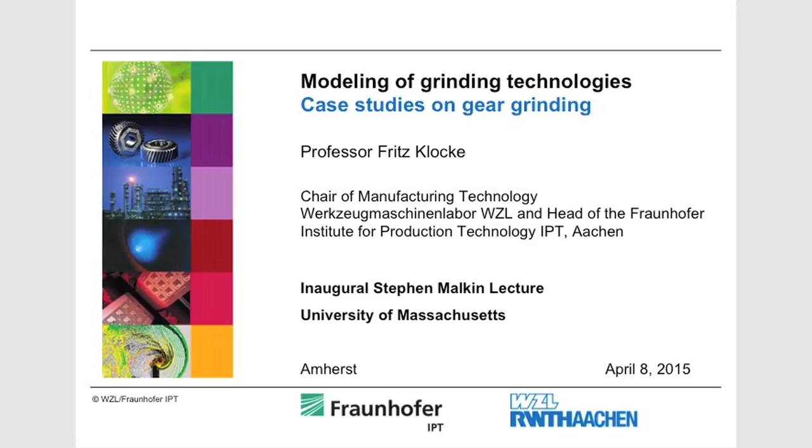Steve inspired others to do their very best professionally by the example he set, not by directives or dictums. He generated love and goodwill in everyone with whom he came in contact by asking a very simple, but too often unasked question: how are things going? And he was an engineer of extraordinary accomplishments, a member of the National Academy of Engineering, and a bright star wherever he went. Steve's wife, Maccabee, and his daughter Ruth are in the audience, and they know I could go on and on about what a wonderful person and colleague Steve was.

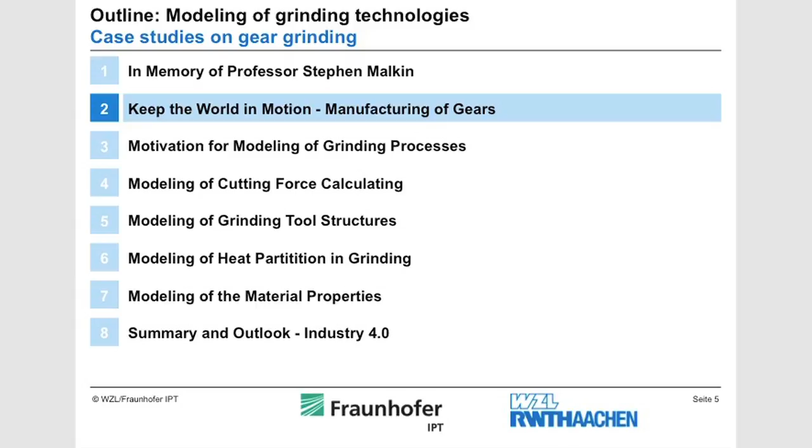So what do we do? Of course we do research, education, and service. That brings me to today's topic: modeling of grinding technology, something about the fundamentals, about the basics. Gear grinding is really a practical issue. So now I have this combination that Steve also liked: learn about the knowledge, learn about the basics, but then solve a real problem.

Gear grinding is one of the most complicated and most delicate grinding processes that we have. So why gears? Is gears old-fashioned? If you go to the marketplace and ask normal people about gears, they most likely say that's blue-collar work and steam engine stuff. But we have gears in many, many different applications.

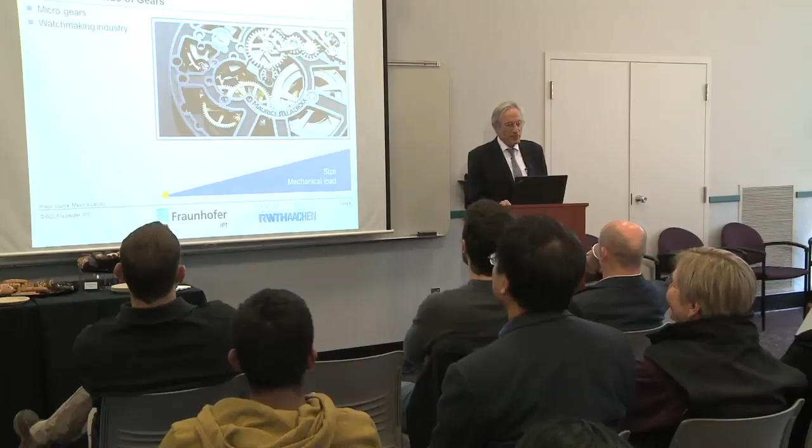That's just high precision gears, as you see here. Then we have, of course, the cars and trucks. By the way, we make about 1 billion gears, pairs of gears, per year, and that's increasing. So we are making a lot of gears.

And if you were a designer in a car company laying out a gearbox, you would say, okay, I shoot for a lifetime of a normal gearbox of 200,000 kilometers, 250,000 kilometers.

If it was a truck, you would calculate roughly about 1 million kilometers lifetime of a gearbox. So if you run into trouble with your car, if you are far away from 200,000 kilometers, you might ask for warranty. But if you are above 200,000 kilometers, most likely they say, okay, that's normal life.

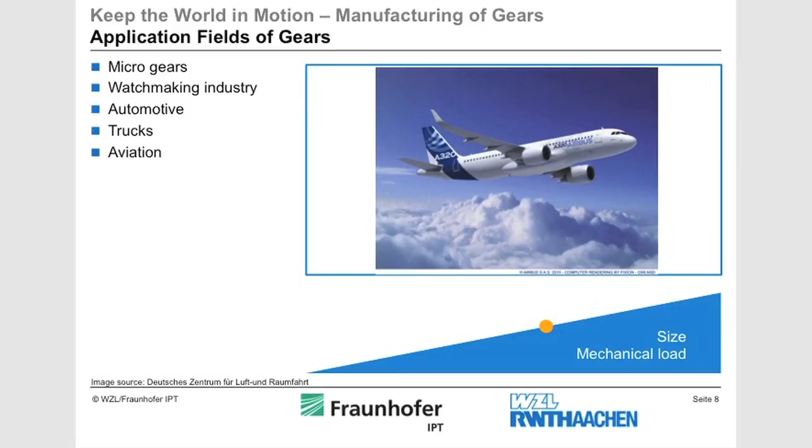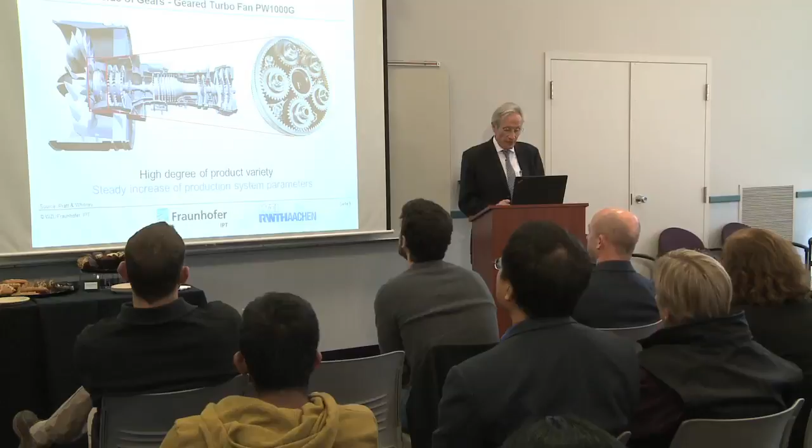We have also gears in planes. That's something people sometimes don't consider. Over the years, there are little gears in planes which adjust the flaps or other components. But in September of last year, a new plane was launched by Airbus, and this plane has a planetary gearbox right after the fan. That is because if the rotor runs at very high speed, you need this gearbox to bring the rotation of the fan down. Otherwise, you would exceed sound speed on the tips of the fan. So now we have also these gears in a real airplane. That is a Pratt & Whitney turbofan, and that is increasing. So that was just an eye catcher.

So these are the flights per day. We have per day about 200,000 to 250,000 airplanes airborne. Every airplane has, on average, 2 engines, so that's 400,000 to 500,000 engines in the air every day.

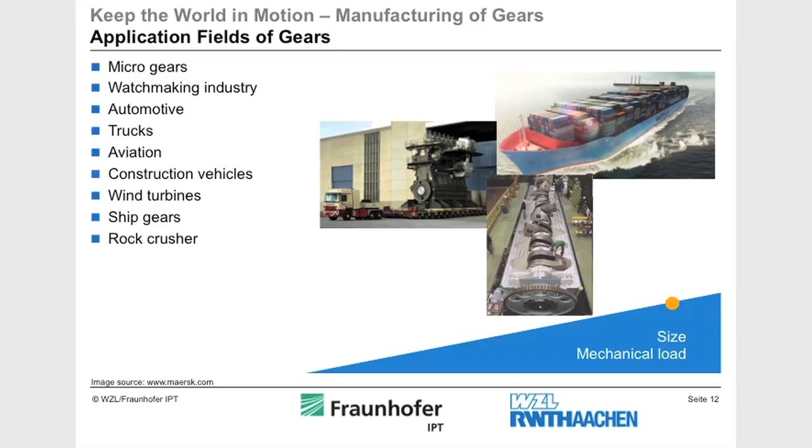That is also well known. So that's energy. If you see these windmills, you might distinguish into 2 classes. One is where the wind power is directly converted into electrical energy, so 50%, and the other 50% has a gearbox, generator, and the windmill. And the last one, of course, we have really big gearboxes for big ships or for rock crushers, etc. Rock crushers, just to give you a number, rock crushing you might have 1 million Newton meters torque, very low speed, 1 million Newton meters torque. That is really a big gearbox and big gears.

So now the question comes up, how is the gear made? That depends, of course, also on the size of the gear. I take now the gears which are used in trucks and in automobiles, personal cars. You start with a blank, you cut off the teeth, and after that you normally have a heat treatment, so case hardening, and then you do hard finishing. That brings me to today's manufacturing processes I will look after: the hard finishing processes, the gear grinding.

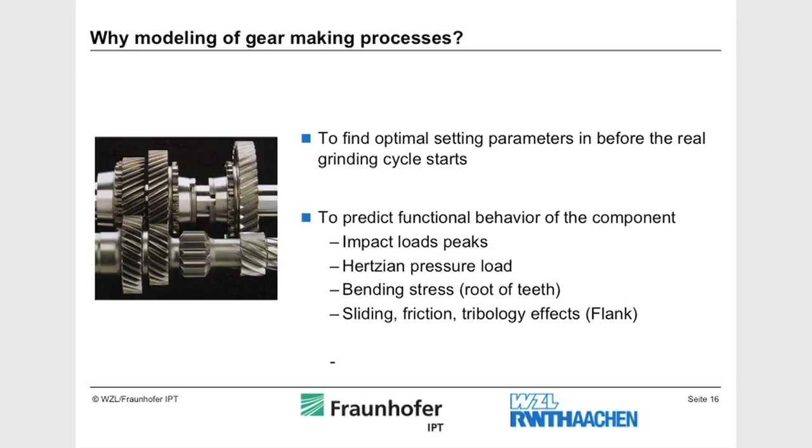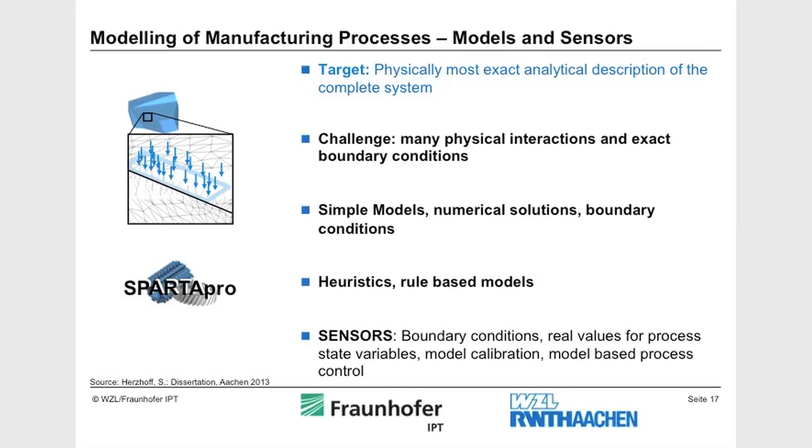So why do we really shoot for models in modeling gear making processes? Of course, to find optimal setting parameters, to keep the costs down - that is number one. But what is even more important is to predict the lifetime of a gear. Any cutting process needs energy, and at least a portion of this energy goes into the material, into the component, and it changes the properties of the component - whether or not that is allowed within the tolerances is the second question. The first question is we really have to consider, we put energy on the surface of the material, of the component, and then we change the component properties, and at the end, most likely, also its life. We would like really to predict the lifetime. That's the reason why we have this approach of modeling. And it's always our target really to come up with a very sound model which is based on physics, on constitutive parameters, etc.

The problem is there are so many interactions. Another problem is boundary conditions - in general, which we sometimes do not know. Then we have a set of parameters and a set of very nice differential equations, but as we don't know the boundary condition, our result is not good enough. So in German we have a saying: God made the differential equations, the boundary conditions were made by the devil. And that tells the whole story.

So then we go to the next step. We have simple models, we use computers, which is good, but also heuristics - if you have experienced people who really know what they are talking about, that's also very valuable. Ask people - heuristic and rule-based models are also good. And the last one, which should be the last portion and last topic of my talk today, is sensors. Why not combine the models that we have with the real world, where we really hear, smell, look into processes, where we put sensors on, and then combine good modeling with the real life which we can take from real processes.

So then we have the virtual production, of course.

That's what we look at, to do everything on the computer. And it's not just one process, it's a whole process chain. Start with a blank and end up with a component. And we have the real production, where we have sensors and controllers, which also give a lot of good information, and really match that together to get a better insight of the process.

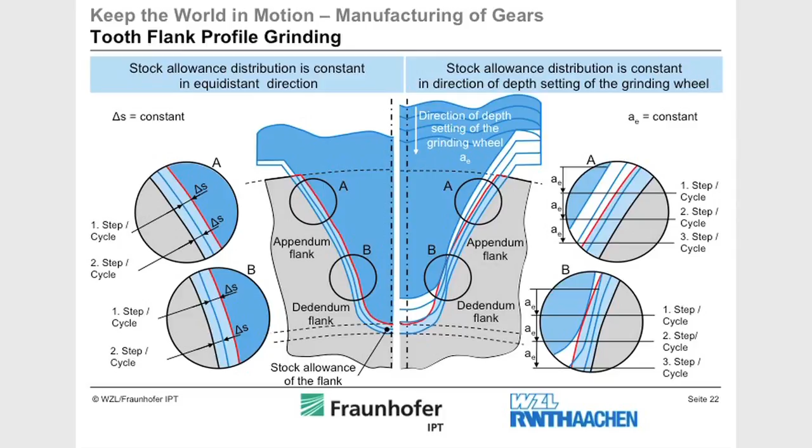As we go a little more in detail, we see it's not so easy. There are many different contact conditions over the profile length, and if something is different, you also have different conditions on the flank of your part. So that's what you first have to analyze: what are the engagement conditions over the flank? Obviously a lot to consider, and that's what you can already learn just from the geometry. It's good.

So let us go to profile grinding. This process is very often applied in industry. You have these profiled wheels, which can be electroplated, CBN for example, or conventional, in which case they get dressed. So you do one gap and then index further, step by step.

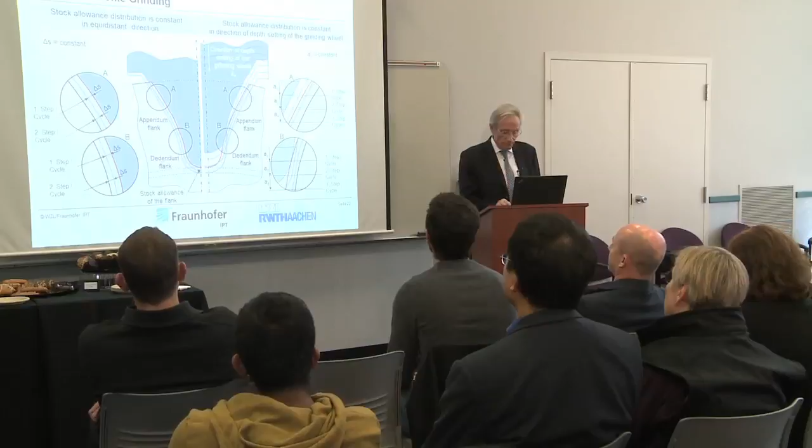So the question was, could we come up with a process where we get rid of this indexing, because indexing always affects accuracy and also takes time. So why not have a process to make these gears in a continuous way without any indexing? Can that be considered?

As we are talking about involute gears, that was one of the assumptions I didn't touch, and there are many good reasons to make an involute. I have this little animation to remind you how an involute is made. You have a base circle and a straight line, and as the straight line rolls off the base circle, you get an involute. That's how it looks.

Easy thing - what you need is a base circle, rotation, easy to do in a machine, and a straight line which rolls off. Straight is always good; if it's profiled, it's more complicated, but straight is easy. Engineers did this 100 years ago, and one of these pioneers sits in Rochester, New York - that's Gleason Company, Pfauter Gleason Company.

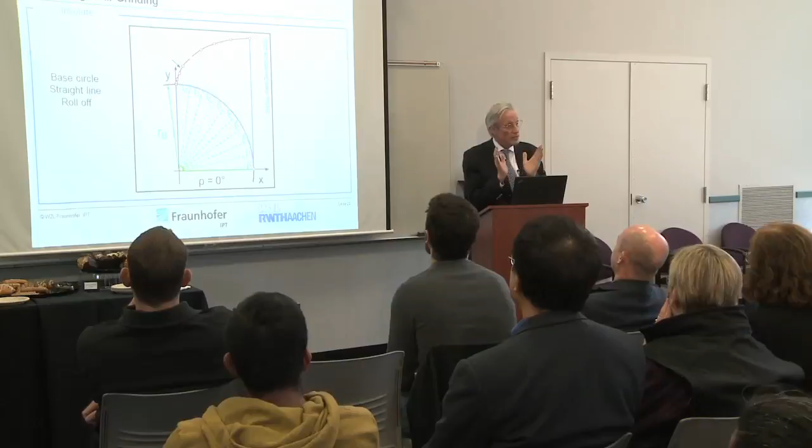They came up with this idea to make a continuous process, where you really have a combination and coupling between rotation and translation in a very distinct way. And at the bottom line, what you get is an involute - that's exactly the profile you like to get on your gear.

So we look at it, and obviously they work very nicely with one another. That's what we see from this little animation. What we see is all the pitch points sit on one line. That's also good for some other reasons. So obviously it works - how to make it? Now we go a little more into detail.

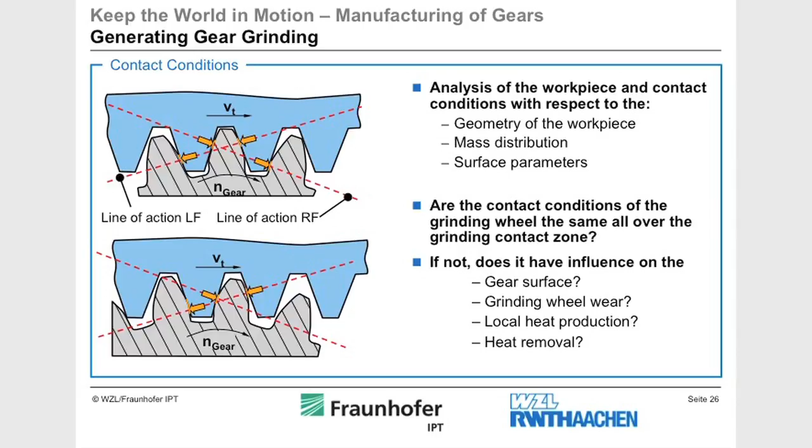We have our tool, we have our workpiece, and what we now see in this slide is different contact conditions. There is not just one flank in contact - there might be three flanks, four flanks, two flanks, whatever. So there's variation in contact condition, and the points of contact also vary. If that is the case, the forces do not compensate - you have resultant forces, and resultant forces can run you into trouble because of deflections, etc.

So what is the learning, what is the message? Just by doing this geometric analysis, you already see - take care, look at it. And if you change the kinematics, and change diameters etc., you also change these conditions. What is already good, and that can easily be done on a computer, without any knowledge of grinding. It is just geometry.

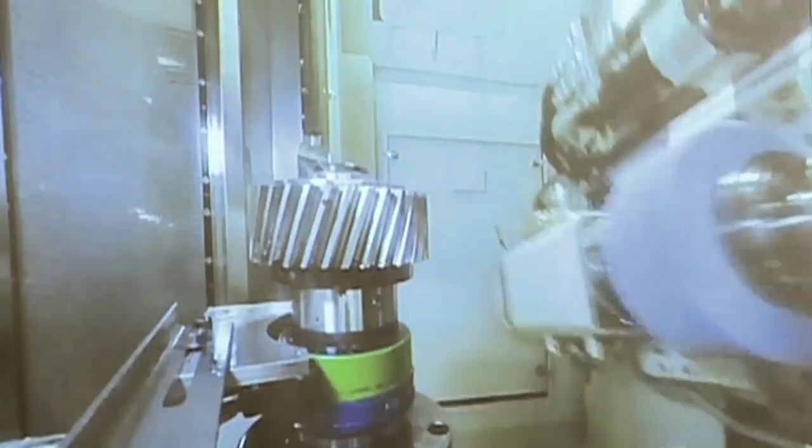Okay, so that is a real machine, how it looks like. Yeah, okay. So that is a real gear from a windmill, from this planetary gears from a windmill. That is our grinding worm.

You might see, or at least imagine, that are straight flanks, so that's easy. And they very nicely work together with the gear, and it's continuous. So there was no need to index them.

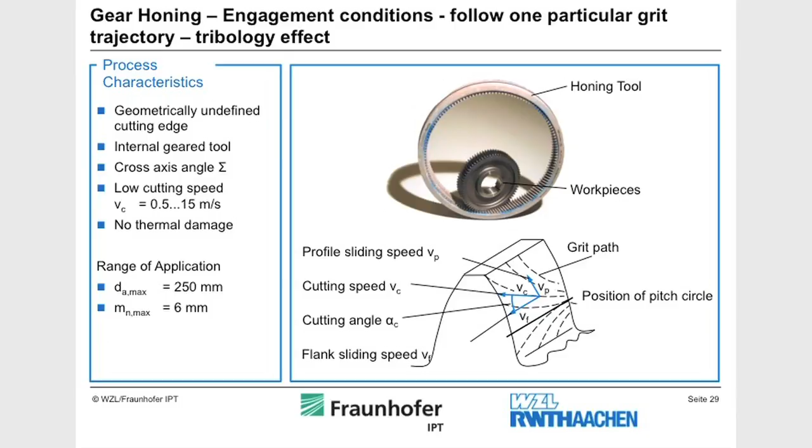So now we have another process. We have profile grinding, we have generating grinding, and that is the third one we can look at. So I picked this, what we call honing or slow motion grinding. We could follow just one particular point, how it travels, the trajectory, how it travels over the flank.

And then we see the trajectories, and that is a particular pattern what we see here. It comes out of this process. We see they are banded convex or they are banded concave. And there is in the middle the position of the pitch circle, everything is 0.

Why is that important? In a gearbox, you have 2 gears. They work together with one another, and you have lubrication in between, and you have tribology. And if you now have these structures, these microstructures, they could be really helpful in bringing and feeding in oil, for example, and make your gearbox working more efficient.

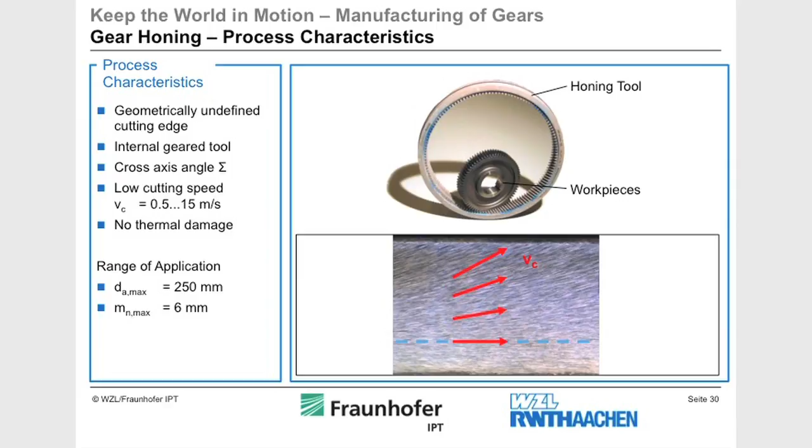And that's what you really also see on the flank. Also, something independent on the grits you use, independent on the wheel you use. That's what you just can learn from kinematics.

Okay, so that was done now. We know the contact conditions, macro scale. We go a little bit deeper in the process. We look at the grinding wheel.

So all the grinders here from Saint-Gobain, they know that, but there might be some others which see some surprise here. So you have the grinding wheel, and the grinding wheel is easily composed. It's composed of grits, it has pores, it has bonding material.

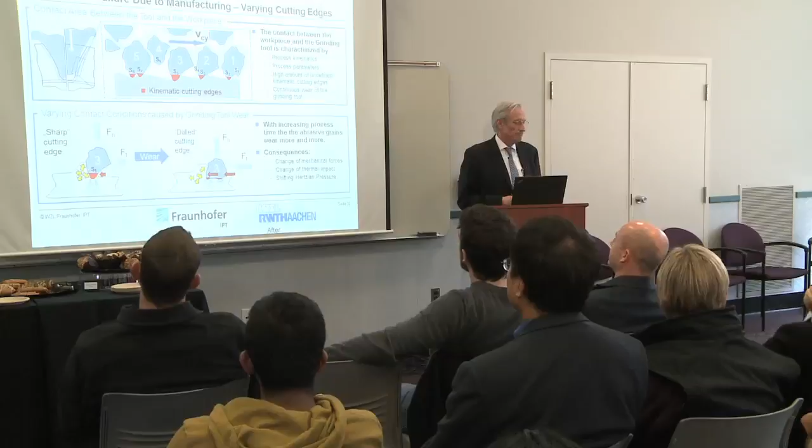The grits provide the cutting edges. So what you see here from the cutting edges is they are geometrically undefined. It's not a sharp cutting edge. It could be sharp, but sometimes they are also just rounded. That's number one. And if you just count the grits, that doesn't give you the number of cutting edges.

There might be one grit which has more than one cutting edge, so the number of cutting edges differs from the number of grits. Second thing, the third what you see here is not necessarily all cutting edges which you see under the microscope come into contact with the workpiece.

They are hidden, they sit a little bit deeper, so there is a space, and they are randomly distributed in that space. Depending on your kinematics, depending on your infeed, you have more or you have less cutting edges. Not bad to know that can happen.

The second, now we look at the cutting edge. Cutting edge can become dull, can break, the whole grain might disappear. So there's also fluctuation in the number of cutting edges. That has to be taken into consideration if we are talking about how a grinding wheel behaves over lifetime.

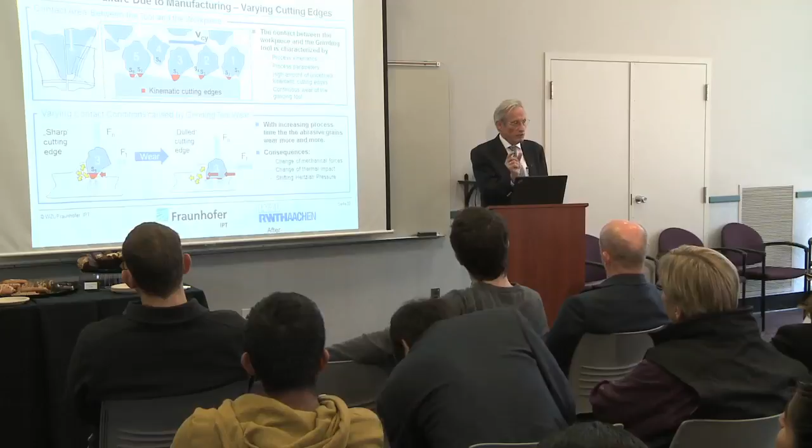Everything goes into the topic heat partition, goes into the topic energy conversion, goes into the topic energy impact on the flank of your ground gear. Okay, so more or less you're happy, now you know everything, you run your process, and what you see is marks.

Well, that heat and grinding, that goes together like twins. You always have to fight the heat, and the heat impact on the surface, in particular hardened steels and gears. So you see marks.

Is it a bad thing? At least it indicates there was a change. So that's what grinding people call burning marks, and burning is something really very, very bad.

I tell you one thing, when I came to Aachen in 1959 - in 1998, a German company delivered windmills to California, to an energy provider, 6,000 windmills, and they were placed on the hills around the sea over there. And then I got an emergency call from these guys.

They said, Fritz, we really do have trouble in California because one after the other of our windmills, they break, they fail. We don't know why, but the customer is really punishing us. They have 6,000 windmills, and now every day 20 windmills fail, and we do not know why.

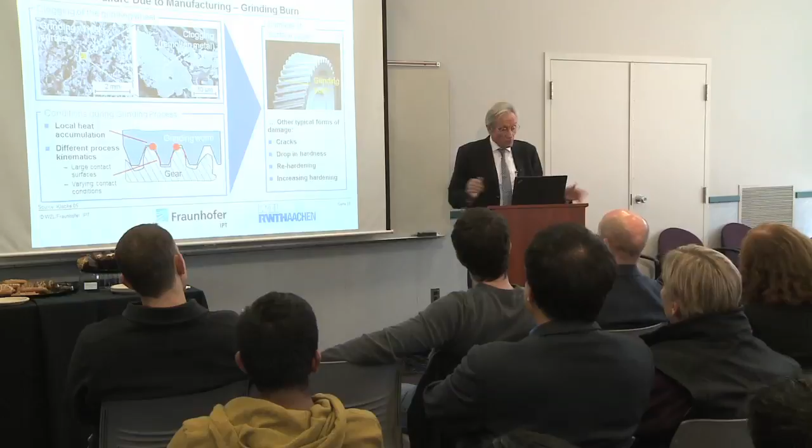So today they have sensors and they have quality inspection at the point. So what happens now with the heat? So the heat goes into the workpiece, and the heat changes the structure.

And so what you might see is really, if you do a cut and if you put it under the microscope, you really might see these white zones, as the people say, because they appear white. Then if you ask people from the material science, they say, okay, we look even more into detail, higher magnification, they say, okay, completely different structure. So ultra fine grained, extremely brittle, etc., etc.

And now you see that you really have to prevent this sort of inadmissible heat influence. So if you don't, then this happens, yeah, damages, etc.

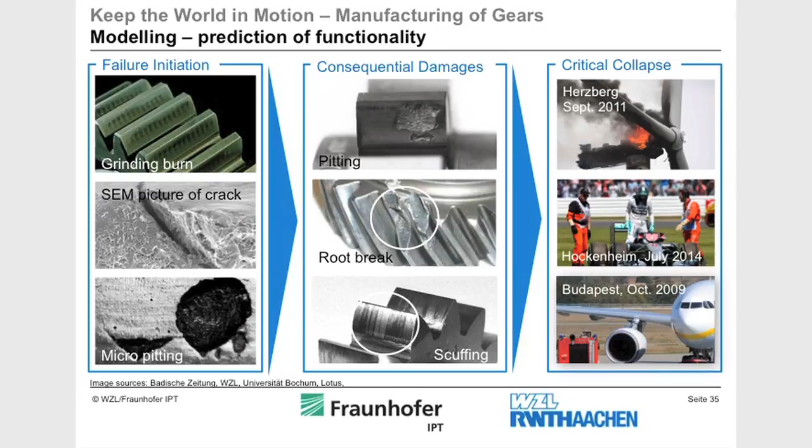So bottom line at this point in time, modeling is good, modeling is important, and even more emphasis is put on modeling processes. And at this point in time, I do have two pieces of information, a good news and a bad news. Starting with the bad news, all models are wrong.

That's the reason, it's models. Okay, keep us in business first. That's absolutely, that is good. The good news is some are useful.

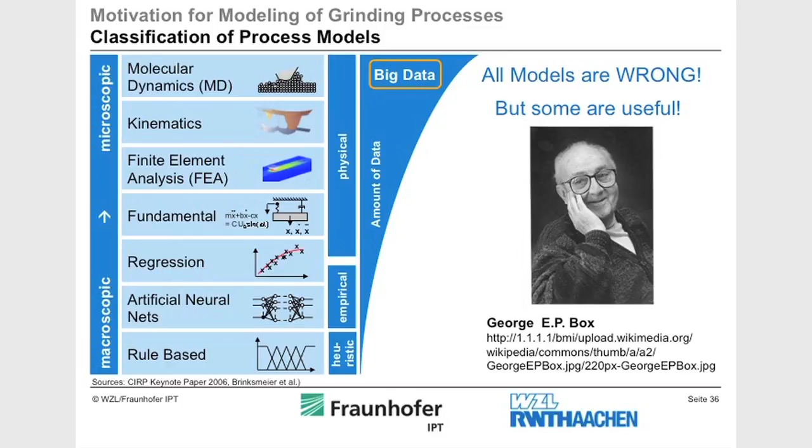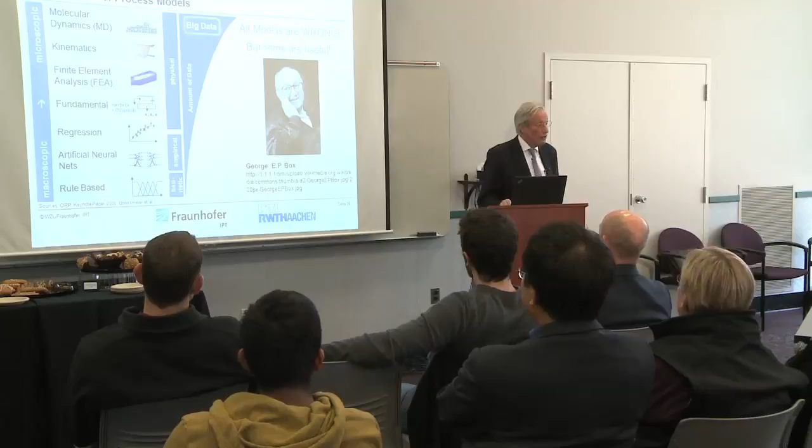That is not from me, that is from this guy. He was a mathematician, he lived many years here also. He was born in England and he lived there in America and did mathematics on statistics. But I think that is really a wise saying. That's what we always have to consider. Some are useful. And engineers are always shooting at the useful ones, okay? And they know a model is a model.

Okay, so now, having said that so far, next step could be combine model with sensors. So with real insight information from the processes, and then make your model and your prediction even better. Let me go to the calculation of cutting force components in grinding, what is really a very delicate thing.

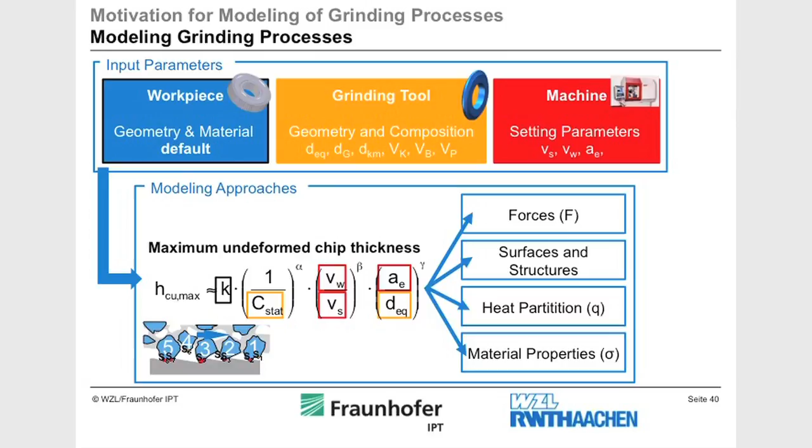Okay, so that is a formula. Steve also used that very, very often, and this formula was at the end investigated at MIT in the 70s from a German researcher. He worked at MIT and he came up with this model. It was Günther Werner, by the way.

He said, okay, you have seen, so we have so many different cutting points, cutting edges, and they go deeper and less deep into the workpiece material. But one distinct value could be the maximum chip thickness, theoretical, not practice, theoretical chip thickness. And he came up with this formula.

And the good thing, the beauty of the thing is, it really gives you the influence of the grinding tool, that is yellow, because that is the number of cutting edges that you have. And that comes from the concentration. If you have a wheel with 24% volume of grains, you could calculate theoretically number of cutting edges. So that's what we call cutting edges static, so you can count them. So that is in the wheel, comes from the recipe.

And then they have your red ones. The red ones comes from the machine, these are the setting parameters. If you go faster, if you go slower, has an influence on the chip thickness. Also the infeed has an influence on the chip thickness. And the last one, that is this geometrical value, which really considers the curvature of the wheel and the workpiece.

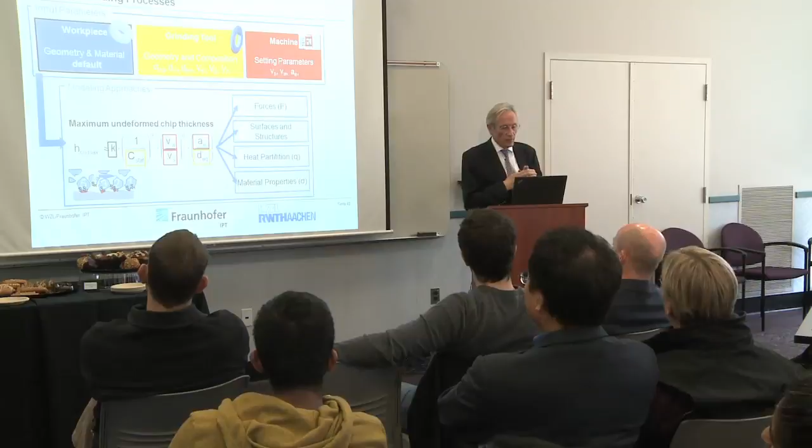So not bad. If you know this, at least you can do qualitative comparisons. You say, okay, I have a reference point, and now you could discuss what happens if I double wheel speed. What happens if I double infeed? So in which direction can I consider that the chip thickness is going to move?

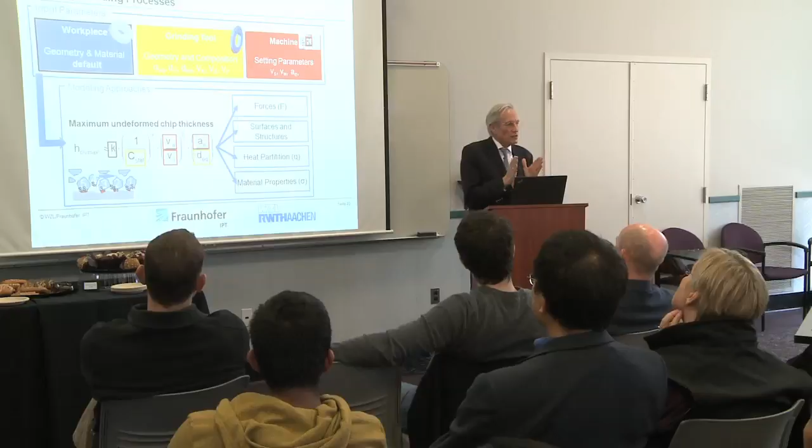And then knowing that, you could say, okay, if that was the case, I could also at least predict somewhat cutting force components. I also could predict surface roughness. I also could say, okay, heat partition might be also a good measure. Material properties, okay, might be too far away.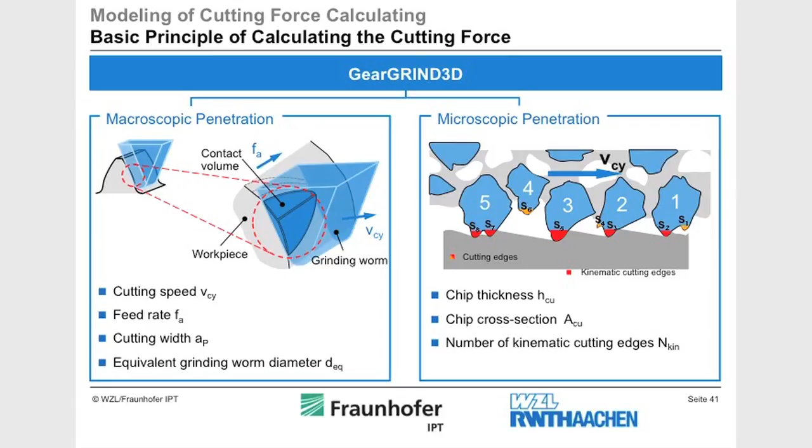Second, okay, that was just one value, but the theoretical chip is a volume thing. It is not just one length parameter. So you have to consider some sort of volume. And what you see here is the theoretical volumetric chip. So that gives you even more information. If you know that, you even have more of a clue what really happens on a single cutting edge.

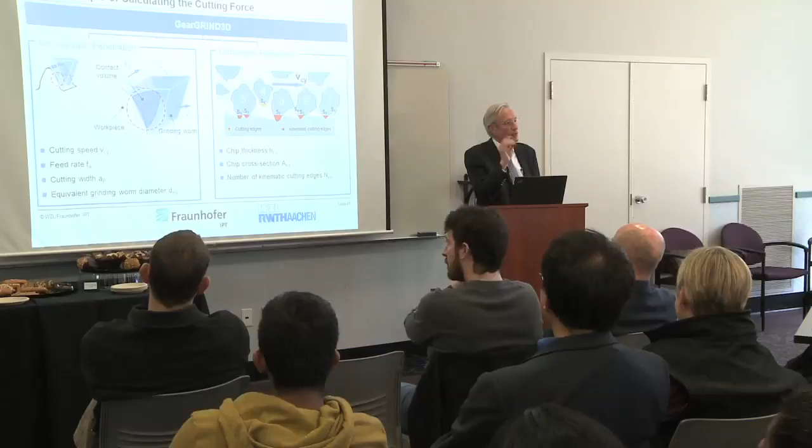For the moment, what I'm talking about is everything is, again, geometry. It is kinematics, it is geometry. I didn't touch mechanics. I didn't touch chip formation. I'm just talking about the constitution parameters of a wheel, of a workpiece, etc. And I get some information about what could happen theoretically.

So that was brought into a huge program. And well, now we can run on this basis, we can run all these processes on a computer, and we can do parameter studies. You see reference values, and we change parameters, and then we see, okay, if we do this one, and this one, and this one, we could expect the process to behave this way.

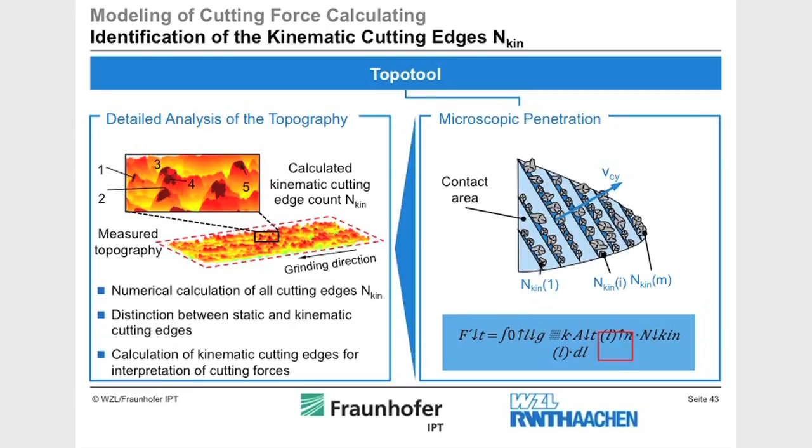Real values now would be even better, okay, for the cutting edges. So then we take a real grinding wheel, we put it under a microscope or on any other measuring device, and then we measure the topography. So now we really get micro information, information on the micro scale from the topography.

Now we see the grits. And we also have real grit shapes. And you would say, okay, that is just for one wheel, but you have thousands of wheels, a million wheels. That is correct. So what you could do then is make groups and representative topographies out of these groups, and then set up a library.

And then you have your topography in a library, and you couple your real geometry topography to your geometric movement, to the kinematics, and then at least you are even closer to reality, because now you have real parameters.

Second thing is now, as you also have the kinematics, you could calculate what were the static cutting edges, so that's the cutting edges which you can count. And now the kinematics really reduces this number. We call them kinematic cutting edges. Now you really see how many cutting edges will be engaged, will be in touch with the workpiece, and that gives you even more information about what the cutting force components could look like.

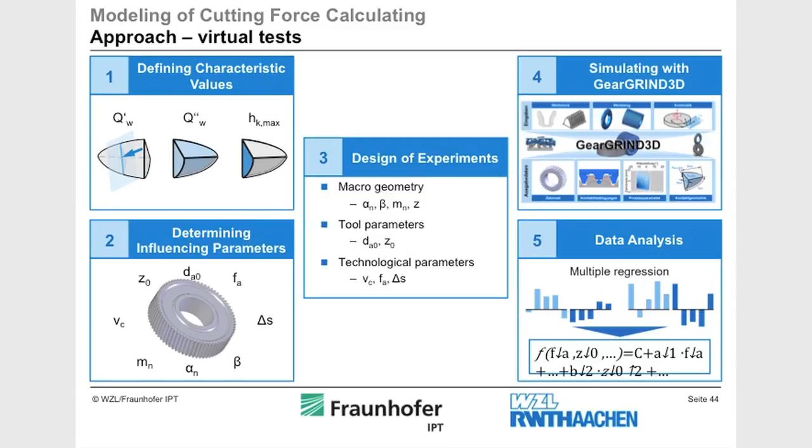And again, you do parameter tests on a computer and not on a grinding machine. In any case, you have to verify these tests then, but you do the big bulk of simulation on a computer, and then you pick out distinct conditions and you verify that in real grinding tests.

So if that was done, of course, people came and said, okay, grinding wheels, that is also good, that is also a business in itself. So we have grinding wheel makers, and we have machine tool makers, of course, and grinding wheel makers. Let's do the same thing just with a grinding wheel.

So if you make a grinding wheel, you start off also with a recipe. So somebody sits at a computer and says, okay, that is the recipe. I take this one and this one and this one, these are the portions, I mix it together, I press it, put it in an oven, fire it, and have my grinding wheel. Sorry, I do it very simply, I know it's a little bit more behind, but these are the main steps, okay.

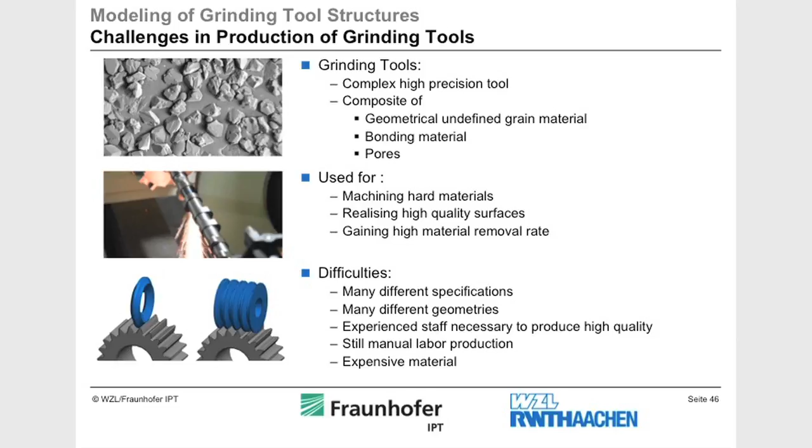So now, if that was done, or if those were the main steps, the question was, let's model a grinding wheel, the grinding wheel making. Let's also try to do that on a computer, where we just have to know the bonding material, where we just have to know the grits, grit size, shape, and then also let's do the recipes on a computer to see how a grinding wheel could look like if we do everything on a computer.

So on the slide above, what you see, that is a plated wheel. You look at it, what you see is randomly distributed. So that's not a pattern. It is just random. The grits are randomly distributed.

Number one, number two, you see the bonding, and you see the grit shape. You might see there's not one distinct diameter of the grits. There's also a spread. If you say grit size is 180 mesh, then it is between 120 and 240. It might be a Gaussian distribution curve, but you have also always a spread.

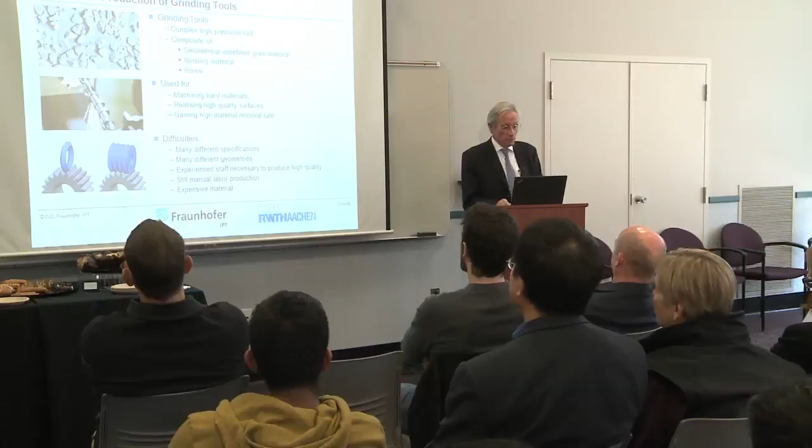As you know, you could start, okay, let's do the modeling. Same thing again, start with the geometry. The grain shape, put it in an X-ray examination, find the grain shapes, model the grain shapes, and now get a numerical model of grains and put that in your library.

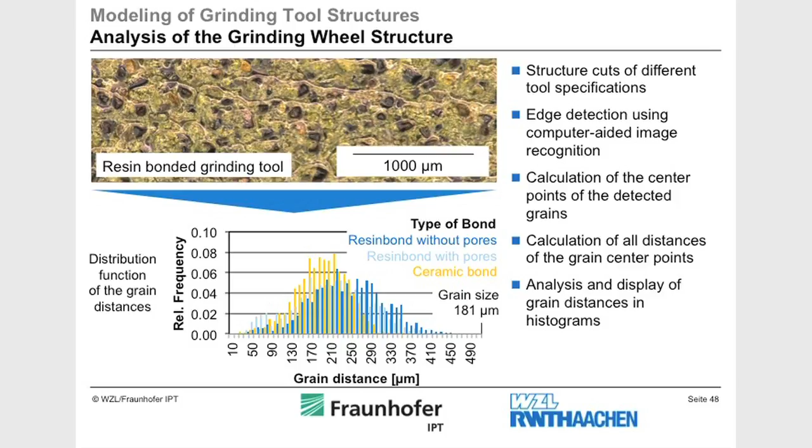So that is a real grinding wheel. It's a resin bonded grinding wheel. You just look at it. You see the grits, you see the bonding, and now we did some measurements to really see the real distribution of these grits. And what we found out was, so we made grinding wheels with the same concentration of grits.

So the volumetric concentration of grit was exactly the same. It was 24%, C100 or V240, so 24% was the grit concentration. The grit size was also the same, the geometry was the same. The only thing that was different was the bonding.

So what we see here now, the slide might be a little bit busy, but if you look carefully, you see these yellow bars, which represent ceramic bonds, and you see the blue bars, which obviously don't fit 100% to the yellow bars. So there's a shift in between. And the only influence here is the making, the grinding process. That was a phenolic bond or an epoxy bond compared to ceramics.

And if you process a phenolic bond, okay, you do it with heat and pressure at the same time. And then you have high viscosity, and then also the grits start to move, and you also change volume. At the bottom line, you get a wheel, despite the fact that the number of grits were exactly the same, the distance between the grits is different. So if that is the case, you have different grinding behavior.

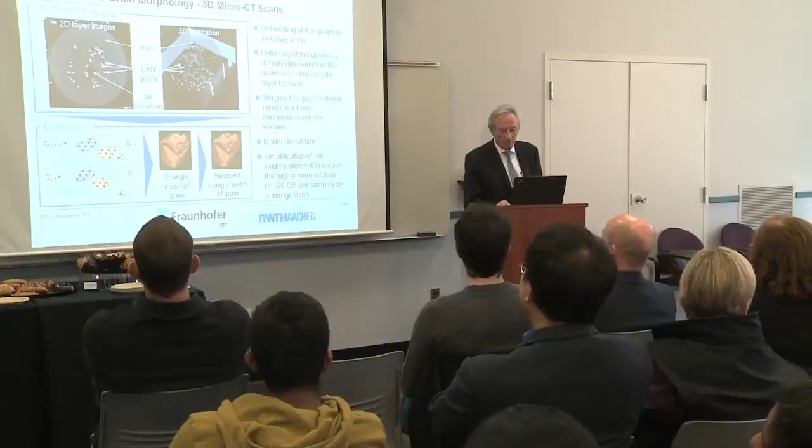So I stop here. So at the bottom line, what we have today is at least the beginning of the modeling of grinding wheels, real grinding wheels, considering wheel shape, considering grain shape and grain concentration, to come up with a topography which we then again can bound to our geometrical model to do the engagement analysis, and heat partition. So I cut it a little bit shorter here.

Heat partition, same thing, so just one single grain. The grain goes through the workpiece. And then as the grain travels, first through air, and then it touches the workpiece, first contact, and what you have is elastic deformation, followed by plastic deformation, and then you have a chip.

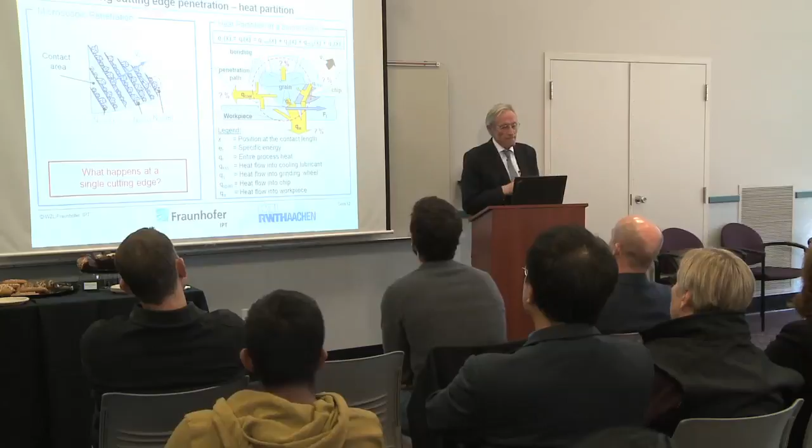So that is easy. So on this path, we have this energy conversion, from the rotational energy, from the mechanical energy into heat energy. And then as the heat is there, depending on the contact conditions and on the time durations, the heat travels either into the workpiece, into the grain, into the bonding material, or it's taken off by the coolant. So we are interested in this Qw because that is the heat that goes into the workpiece, which we really have to know in case we like to predict functionality.

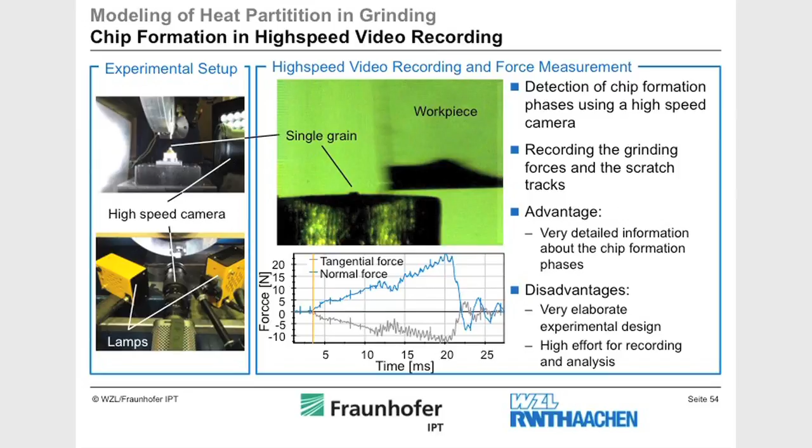So we did the same thing. Came up with a single grain, looked at the single grain, really studied what happens if a single grain goes into the workpiece. So what is the portion of the elastic energy? What is the portion of the plastic energy? So at which point in time do we reach the damage of the material?

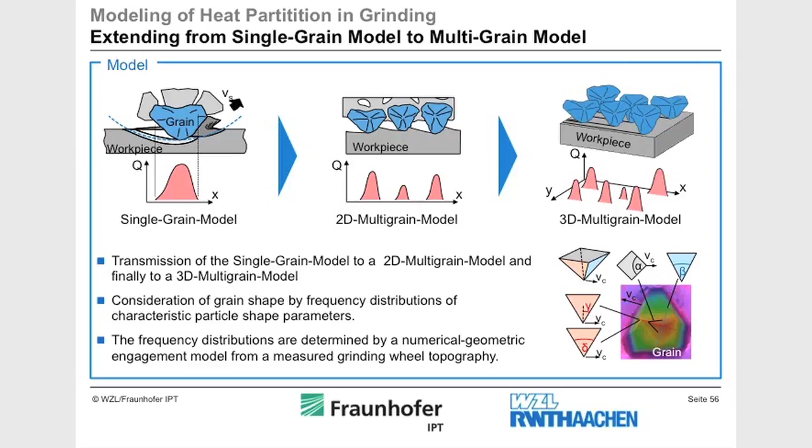So little cracks are induced, and then the first chip is made. To really learn more about what happens at a single cutting edge, we convert that to numerical simulation, and at the end feed everything together to hopefully have a model which tells you what the partition of energy is that goes into the workpiece under given conditions.

So if that was the case, now you can fiddle around at your computer. You just change setting parameters to see if it's better or worse. New grinding wheel, better, worse. That is the beauty of this toy.

You told me yesterday it's a toy. That is really a toy.

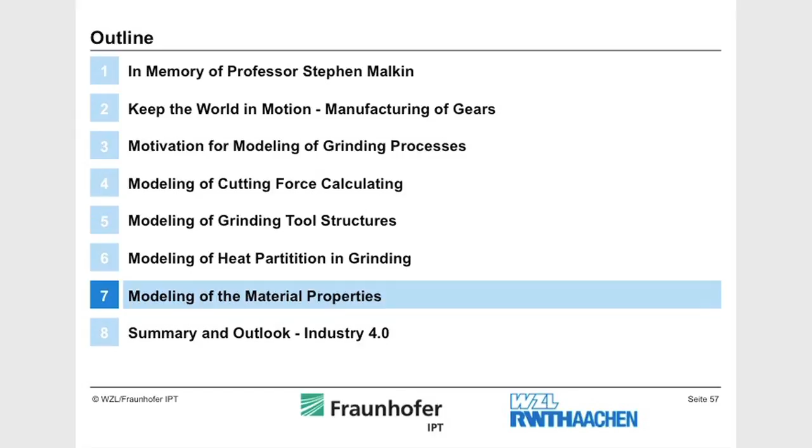Okay, so now, any questions? I'm talking, are there any questions? Yes, please. How do you verify the findings of the heat partition?

Indirectly. So we do it - let me first do this paragraph - because the heat partition now goes into the workpiece, it changes the material. And then we look at the material and see the changes in material, and we correlate that to the heat impact. And then we could verify also our model, whether we really did have the same assumptions, material properties.

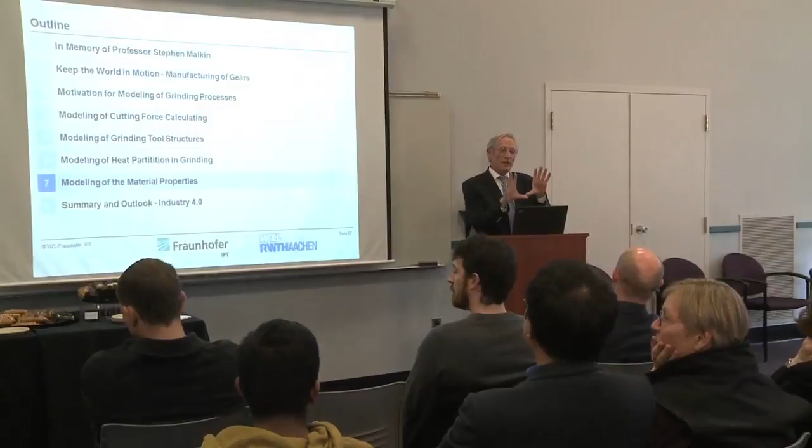So the heat now goes into the workpiece, okay? I was talking gears, okay? So what we really do know is it is not just the heat which affects the structure, it is also the mechanical stress. It's energy - energy is energy. So the material cannot distinguish whether it was heat or whether it was mechanical. The material just feels stress, a pain in the neck, and doesn't care where it comes from. According to the pain in the neck, the material changes properties. So, as people do.

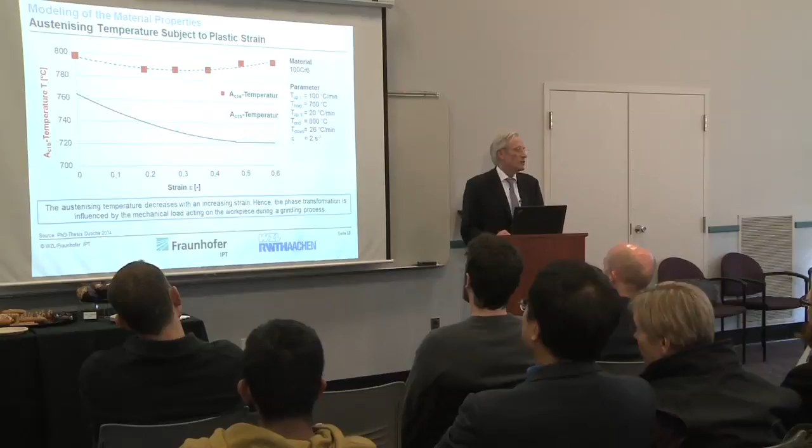Okay, so as we now know what the mechanical conditions are - we know the cutting force components, we also have some clue about the pressure - and we have our material, and we know the material properties. What this slide shows is that the temperature at which phase changes occur is dependent also on the stress conditions, on stress and strain. So if there was no mechanical stress and strain, in this case 760 degrees centigrade changes to austenite. Under real grinding conditions, you see this temperature drops down.

So what is important, because at the bottom line you would like to know the phases which you have in the material, that has to be done by experiments. How can you do these experiments?

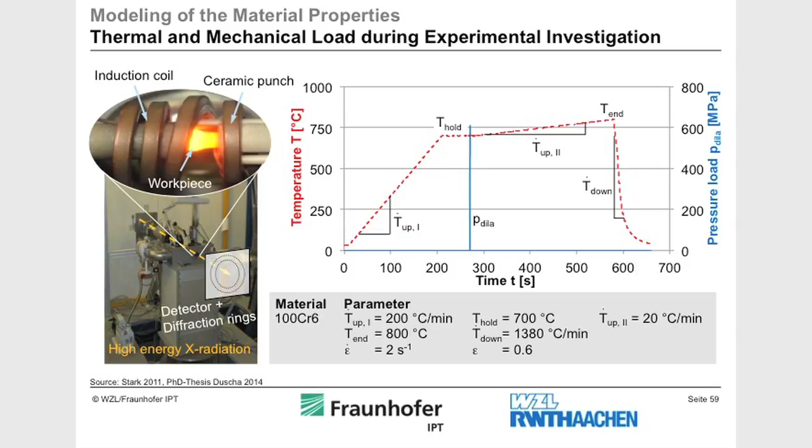So we made little specimens - you see a coil, ceramic punches, and then in between we have this material. We heat it up, put it under pressure, so we have pressure and heat according to the real grinding conditions, and then we send X-rays through that material.

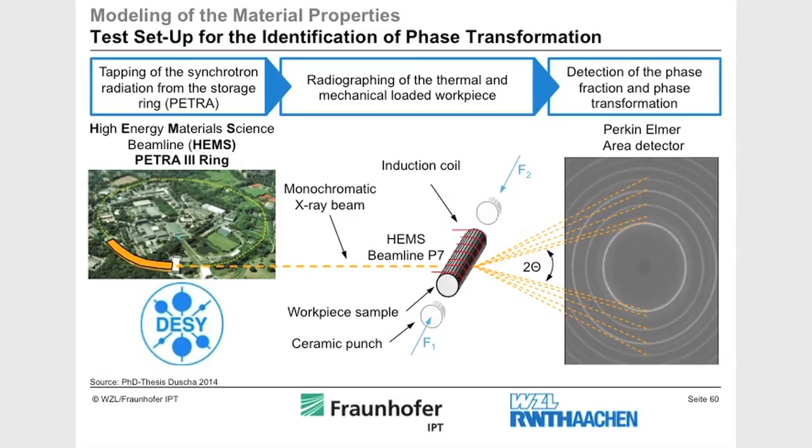And according to the phases that we have, we see diffractions of the X-ray, what is called Bragg's circles. So we see these patterns, and material scientists can really analyze what it is. So we have this correlation. How could we do that? You see this? That is really a highly sophisticated test stand.

So we met some friends in Hamburg who are nuclear physicists. They do particle collisions - they really accelerate particles and let them collide, and then they look at the remains. So what they did was, how they do that, they have a big ring, a tube with big magnets, and then they accelerate these particles, let them collide, and look at the remains.

So they need time and space to do the acceleration. And the clever thing was, let's make a circle instead of going straight, because then you'd need kilometers. Let's make a circle and let the particles travel in the circle. There was a guy at MIT in the 40s who, based on quantum mechanics, said: if you send nuclear particles in a circle, because of the acceleration they should emit radiation. And that's what they do. So the nuclear scientists were not happy about it, because with radiation, they lose energy.

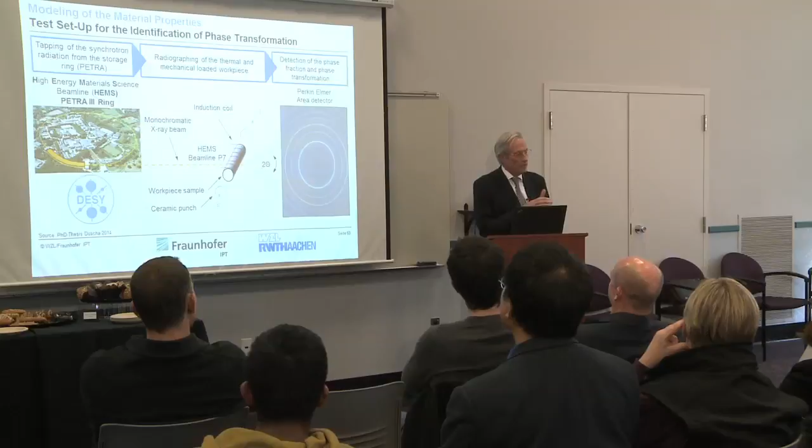So in that case, they were not happy. But then the material scientists looked into this radiation, what is called synchrotron radiation. They looked into it and found it extremely bright, extremely high energy, and it covers the whole span of electromagnetic waves. If you just look at the visible part, it is 10,000 times brighter than sunlight. So extremely high energy. The good thing was, material scientists came and said: if that is the case, this sort of wasted energy for the nuclear scientists, we can use it.

And they made filters, and now you have extreme high and powerful X-ray, which is good for material inspection. So we put all the stuff into these chambers where the nuclear scientists do their fundamental jobs, and we use this sort of energy for our things in there.

They were also happy about it because they didn't know about grinding. So we came and asked, what are you guys doing? Grinding, what is that? So we told them grinding is the most important thing in the world, aside from this research, of course. So keep them happy.

Meanwhile, we really built up a little machine. So in the next step, we brought a whole machine into that chamber, so that we could also see under realistic conditions what happens.

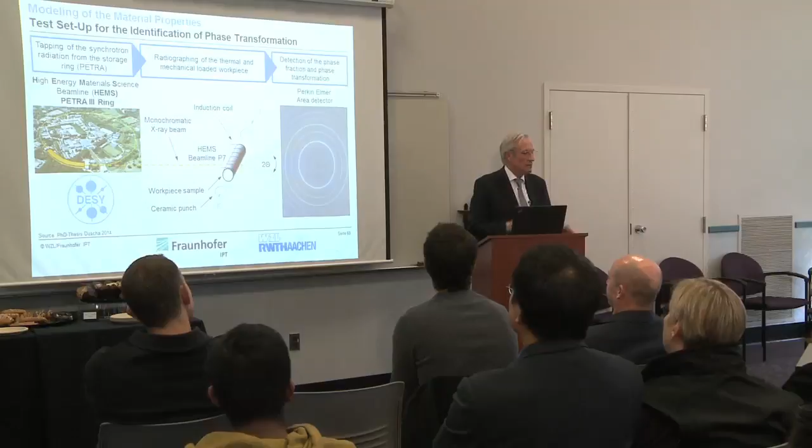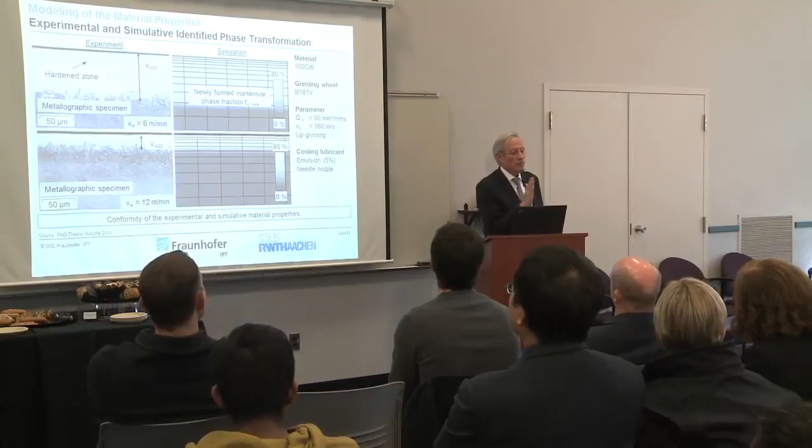So if that was the case, now backwards, obviously our assumptions in the grinding were also not so bad. We were close, or we are close. We can make it better, but we're on the way to say it's proven so far that it could be a way to really predict the surface properties of the ground material. So, consequently, our assumptions in grinding were not so bad. That's how we do it.

That brings me to the last part of my talk, Industry 4.0. I just picked a few buzzwords.

Now it becomes more global. Digital production. In Germany, we have this Industry 4.0, the digital factory, that's what you might also hear. Industrial Internet Initiative, who knows that? Who doesn't know? Brilliant factory, who knows what a brilliant factory is?

The Industrial Internet Initiative was born here in the US five years ago, with five founding members: Cisco, IBM, AT&T, I don't know the others. They came together and asked, information and communication technology has made a lot of progress in the past, could we make this technology also available for factories? So we bring the new approaches of the Internet of Things, another buzzword, to the companies, to the factories, and can factories make use of it? That was the idea.

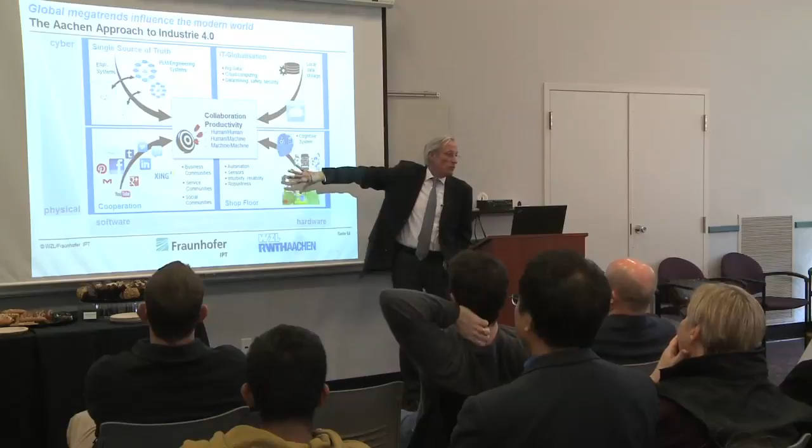The first block is the shop floor, where you run your machines, your grinding machines, where you make your gears. That goes along with sensors and with automation, so that is one block to look into. The second is what I was talking about: modeling, sensing information, so it was also some sort of big data.

120 gigabytes, one week of computing time to get one point. So obviously we are dealing with big quantities of data. That could be done here.

So look into this area. What can we do on these platforms? How can computers help us get better results out of our models? Could we also find new ways for new business models? That's also a question we'll touch on.

So this is the very beginning—where the engineers are, where they design the gearboxes, where you have your product lifecycle management systems. You start there, and your scheduling systems are also here. So that has to be linked into this system, and then you have all this stuff that you already see. So we looked into it.

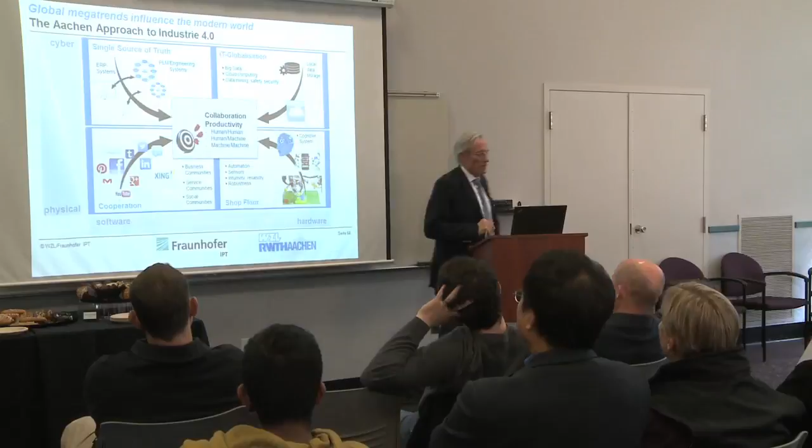And the only question was, can we make use of that also in the real making of products? Is it just for consumables? Is it just for the Amazons? Is it just for healthcare? Or is it also good for gear making? That was the simple question.

So we asked people in industry, how do you feel about it? Have you heard about the internet? Yes, we have, because we all have our computers and use these search engines. So asking people in production, what do you think, how important is it for you? They say, okay, a third say it's very important. Another third say less important, and some are in between, saying important—most likely because they don't know what it means.

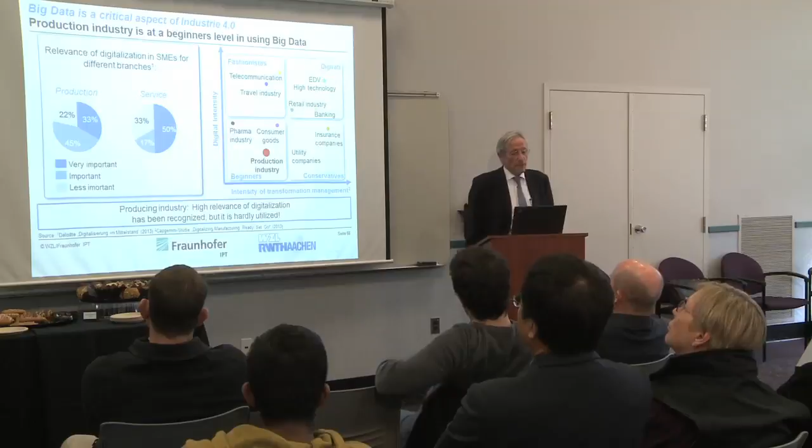So some say very important, maybe just for safety reasons, not to miss something, and others really didn't hear about it. The second group is the service people—those who do maintenance, who are really the face to the customer—they have another sense for this stuff. They say, okay, that's really important. We have to communicate with our customers, etc. So for us, it's important.

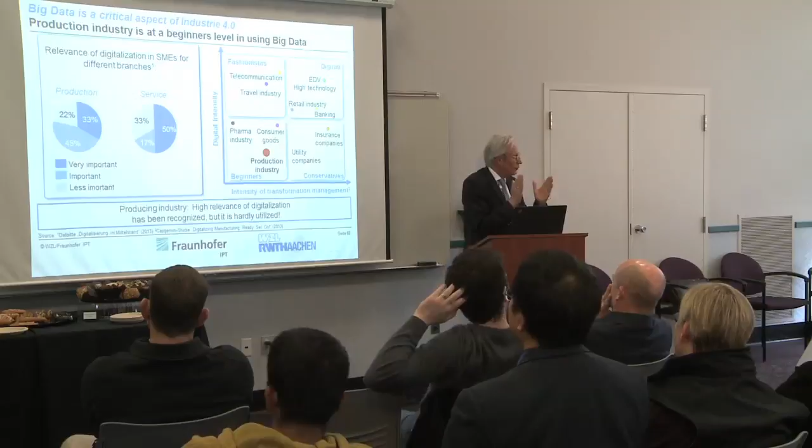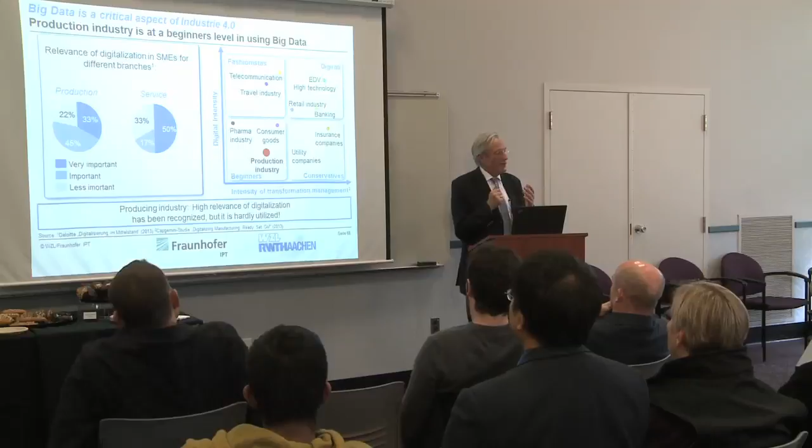Then we try to bring all this information together, always into clusters—we always use four, because managers can just accommodate four clusters, that's the reason why we always take four. So what you see here is: the high technology people are over there, they really know what you're talking about. But the production guys are here, and they might be considered beginners, bloody beginners. The good thing is they have got a clue. And another good thing is, obviously, if you know there might be something in there, you also move in that direction. So the potential is high, and you really can get progress.

So we set up a project where we really traveled around the world, doing interviews in different places—in Europe, in the US, in Japan, in China, also India—to ask people how they judge this new technology. At the bottom line, it is a global approach. It is not a German approach, it's not an American approach, because production is also global. So it has to be realized around the world.

And that is our first output that we found. In Europe, people think, okay, we are good engineers, but we don't make use of these internet things so intensively. The Americans say, well, that's our daily life—what are you talking about? So that is, we do it. You talk about it, we do it.

So the Chinese people just do cherry picking—that's good, we do it. And the Japanese people are also very open-minded, saying, okay, let's see what is going on there. So they are really mixed feelings. You know the Fanuc company? Most likely you do—this big controller company worldwide.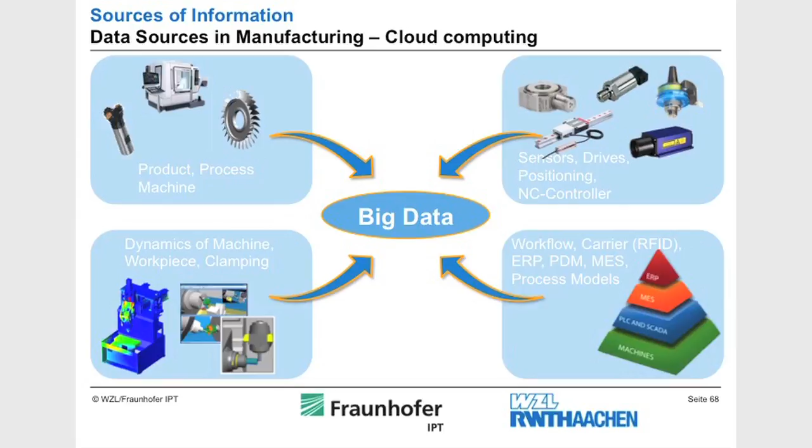Data sources in manufacturing. Okay, it is gear grinding, of course, but also the machine can tell you a lot of things, and also your workpieces might tell you a lot of things. So you might combine that everything together, and then you really have big data.

What for? Now you can really do it in a professional way. You hire software engineers, not just mechanical engineers, but software engineers and also mathematicians. And they do data analysis and data mining in a professional way, and they find out uncertainties, what is uncertain, what is statistics, and what is a trend. And at the bottom line they might also come up with new business ideas.

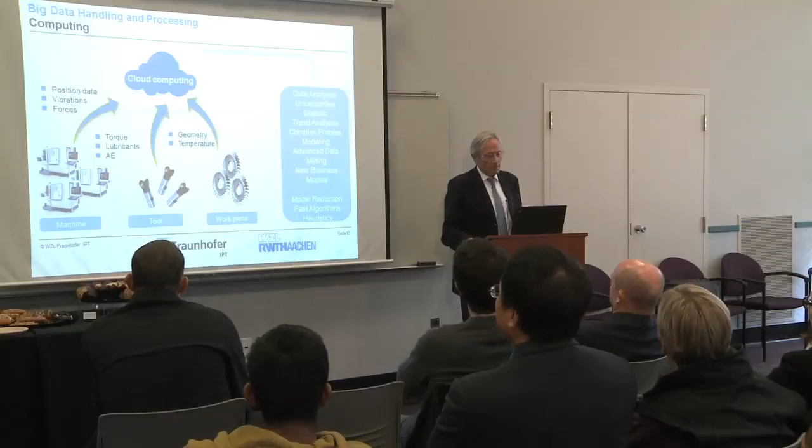So if that was not good enough, way back, rule-based models, also a good thing. So I just look at the very end, this interface between man and machine, because also in this new world it is not a manless world. So people are still there. They might need to be educated in a different way.

But in particular, our kids already grow up with iPads, so they work with their fingers this way, they swipe, so they know that already. So the new generation most likely doesn't fear about it. The older generation has to learn about it.

So I look a little bit at the man-machine interaction and come up with some assistance systems, as we say, to help the people who run machines on the shop floor in decision making. And one thing, of course, is to set up apps.

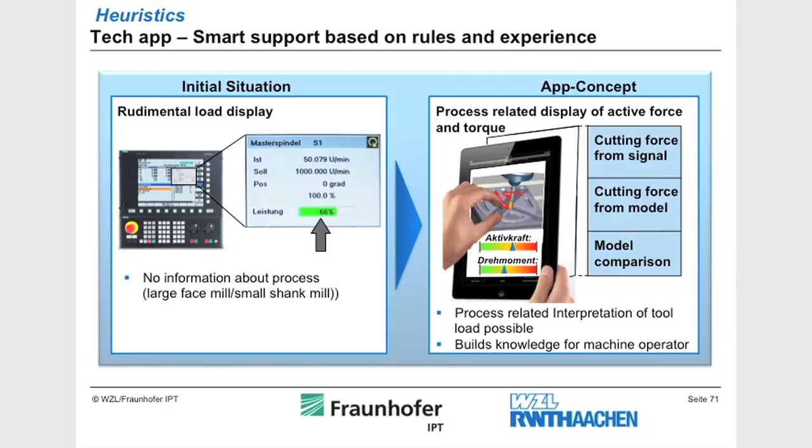Now we do the same thing as you do if you download an app from, say, Street Map. We can consider the same thing. So we run our processes in a cloud, why not? And you might also get some information out of the cloud. You download apps to calculate cutting force components, to calculate heat partition, if the models are good enough. So to give you assistance.

Even if it is just power consumption, you could also see, for example, cutting force components. You could also see that something is wrong with the coolant supply or whatever it is.

So this interaction with smart devices, with machines, and this particular writing of technology apps, it's a wide field for students. So they sit down and they write apps now for everything. And then you also get a library for these technology apps, which helps you take decisions on the spot. And that brings me to the last few slides.

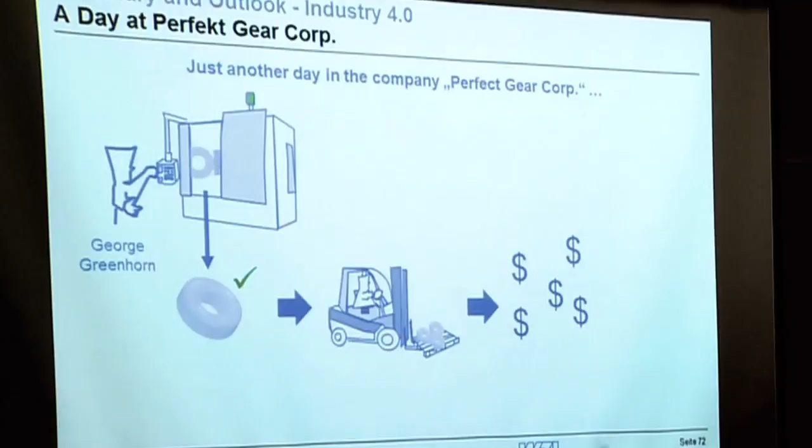Okay, a day at Perfect Gear Corporation. So we have this guy, he operates the machine, and he is satisfied, obviously. Okay, so good business. And a problem occurs, that's today. So what can he do? Okay, scratches his head, of course, number one, and then runs to his friend in the quality department, asking, what can I do? I have grinding burn.

And his friend in the quality department, he is experienced, tells him, okay, go down with the feed rate. That could solve your problem. It takes you longer, but you don't have any problem with the grinding burn. Okay, he says thank you, goes back, changes it, and it is good.

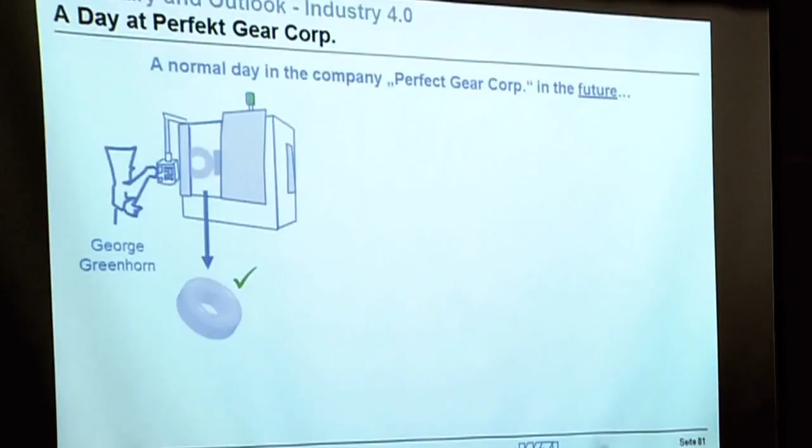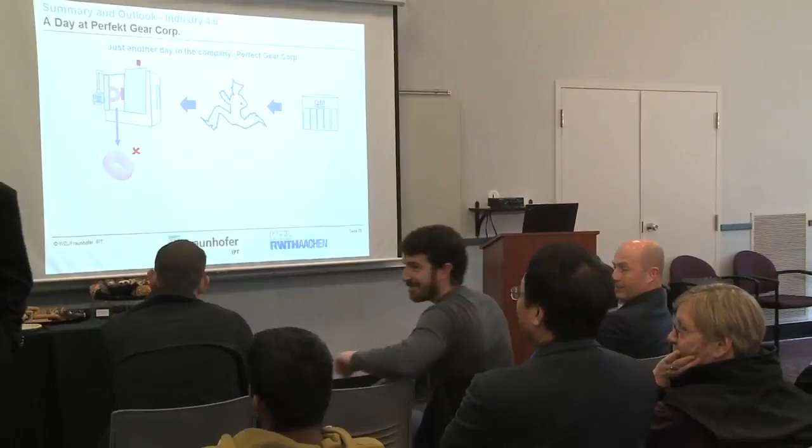Okay, good production again. In the future, by the way, this guy here, the abbreviation, okay, all right, okay, where does it come from? Does somebody know the story? At least I know a story where that came from. Okay, all correct, from German. All correct, from the German. Absolutely. Tell us the story. I don't know the story behind it. Okay, well, the story is as follows. I don't know whether it's true or not.

In any case, it's a good story. So it was Henry Ford. He ran his production lines, and he figured out an engine is the heart of each car, so at the end of production there was quality inspection. To certify that everything was good, he assigned the foreman from the quality department to put his initials on any motor block which was proven to be good. So that's what he did: hammer, initial, embossing. His name was Oskar Krause. He was a German. So that was the story.

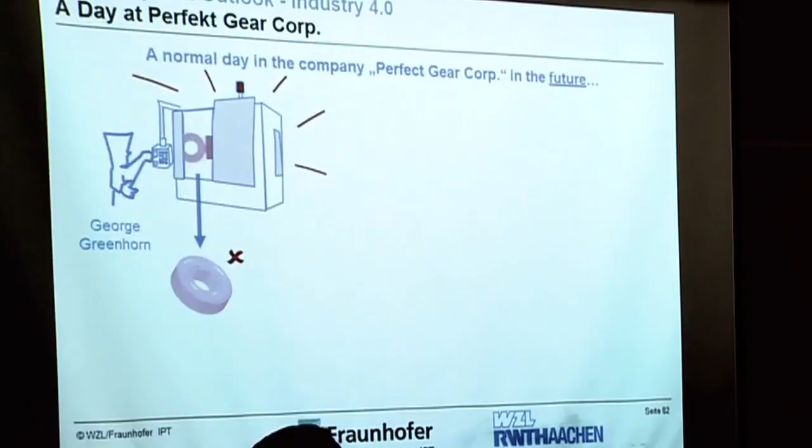So he asked this guy, comes back, good. So next thing now, why not use these apps? Yeah, that might be the future. Because his friend from the quality department might have retired, mightn't be there. So it's better you really have another source where you can ask for and go for it. And so that is really coming up. That is really new, very close to application.

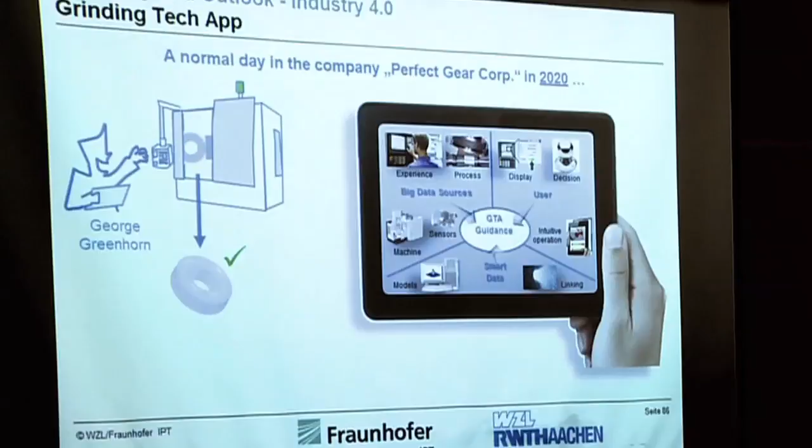I have one more slide. That was new business models, because I'm here in the United States, and you are always keen on new business models. Is this okay? A few minutes.

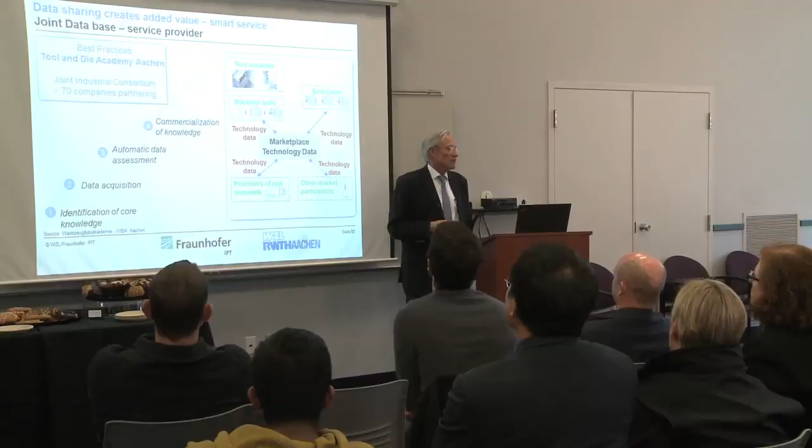So now consider we have this cloud, okay? And we send in information and we take out information. So as long as it is within the company, no problems with IP. So you keep it secure. So that's good. But now we thought, okay, we have machine tool providers, they provide the machines. We have tool providers, they provide the tooling. We have end users, so they use everything, they make gears, they make this and that. We have the raw material providers, they provide materials, also good, and other people.

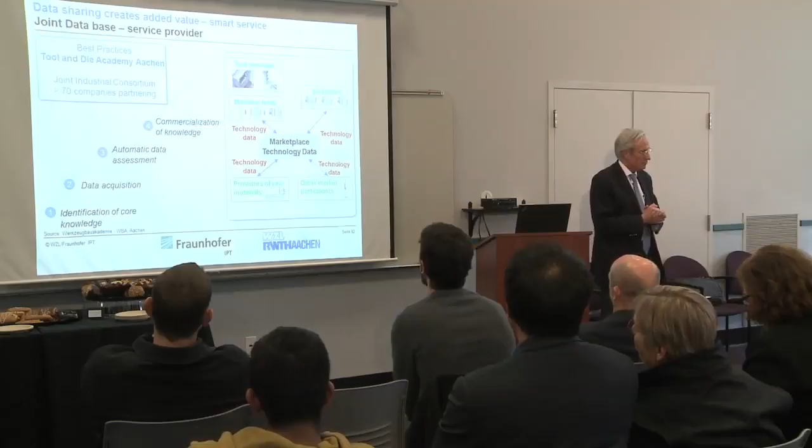So we thought, could it be that you at least consider sharing your knowledge, that portion of your knowledge that you have, open to the public? You share it, you are ready to share your knowledge with others. So first people really had to think about it, because of everything IP. What about our intellectual properties? But then they came to the point, yes, why not? We already have our internet pages, you can go there, you can see your grinding wheels on the internet, and you have catalogs, etc. You already provide knowledge to the outside world. Might be even a little bit more: bring your knowledge where you'll be able to really put that knowledge on this platform.

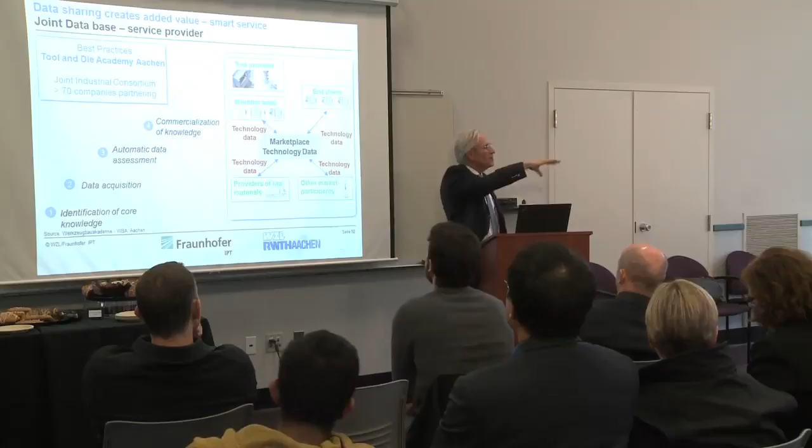And we found 70 companies at least to try. So, okay, we try it. We make a try. We set up an environment, and then we try. We fiddle around, we play another toy on this, and they say, okay, we do it. And now we're really collecting information from different companies, different branches, different industries, but they say, okay, this sort of knowledge, we give it on the marketplace. And now we really receive a bunch of information in the cloud.

Okay, and now if we puzzle together this information in different ways, we could make services out of it, different services. So the material provider, he really looks for another sort of service than the end user does. So now, at least, we have opened up a space where we could say, why not a new business model? Open question is, who owns this platform? Who is the owner? We don't have any answer for it for the moment. For the moment, just we say, okay, might be associations or whatever.

But anyway, you see now collecting data on the one hand side, intellectual properties on the other side, it's one thing. The second thing is now share knowledge. And by sharing knowledge, to come up with new ideas in making new business, service business. So that is open, it's also on the way. And if we have some good examples where that really works, that could also break the ice and could really open up new business models for the future. That was just an idea. Might be you think about it and you spin off your own company. In case you do, let me know.

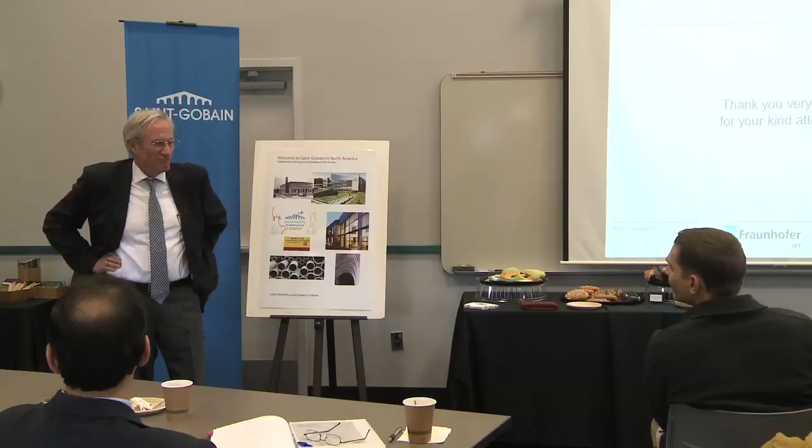The grinding wheel makers might punish me for talking about patterns on grinding wheels, because it's really a pain in the neck to make these wheels according to different patterns. But we did it for research, to get rid of this random effect. A grit is a grit, and there's variation from one grit to another. But without this random distribution, we have distinct patterns, and then we can better study it. That is correct, and that's what we really do.

But by the way, in rollers, in diamond rollers, you might still have this. You have handset diamond rollers still, yeah.

Some of them too expensive, aren't they? Yeah.

Oscar. What was his name? Are you from Norton? Yes, Pennsylvania.

Or Saint-Gobain? The largest diamond roller we made in Hamburg was for Caterpillar. They made these Caterpillar things. That was a handset diamond roller. I still remember the numbers. It was 400,000 single diamonds, this size, this long, this diameter. So it was reverse plated.

And who could set the diamonds? Only women. We did have women, and they really picked the diamonds hand by hand. There was a glue, so you made a reverse profile, and they picked them according to a pattern. Because in that particular way it was necessary, since there was a big difference between the diameters - a large diameter and a small diameter. And then you really had to change the distance of the diamonds to get a surface topography of the wheel, which at the end didn't burn.